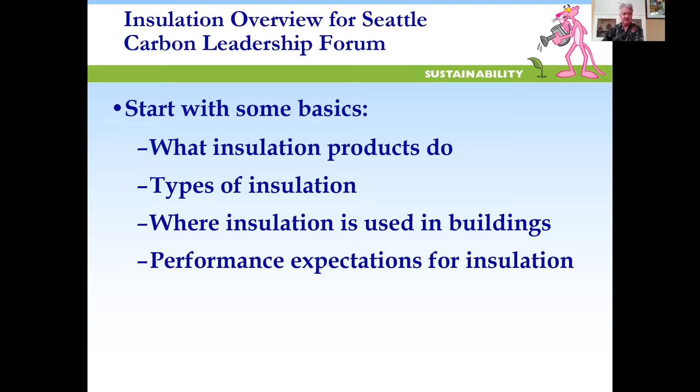So there are some of the things I'm going to cover in the first slides. If you all know this, the good part is I'm going to ask Justin to move fairly quickly through the early slides, but they will be available if you need to refer to them coming up. So Justin, if you could go to the next one, please.

All right, so I think those of you that work in buildings, design for them, know that whenever you're going to make an energy efficient building, thermal insulation in the building envelope is really important. So there's one definition from a trade association website of what insulate means.

I think the second bullet is more appropriate for architects and specifiers in that you're often limited by the building code in terms of the minimum required levels of thermal insulation or the thermal performance of envelope portions that you deal with. So building code sets the minimum, however you want to go to the highest levels of energy performance, like passive house, is up to you.

Those of you, particularly in the residential sector, know that a lot of times the provincial code, the state code, local, it may lag behind the current edition of the model energy code by several years. So that's good to keep in mind. Next, please.

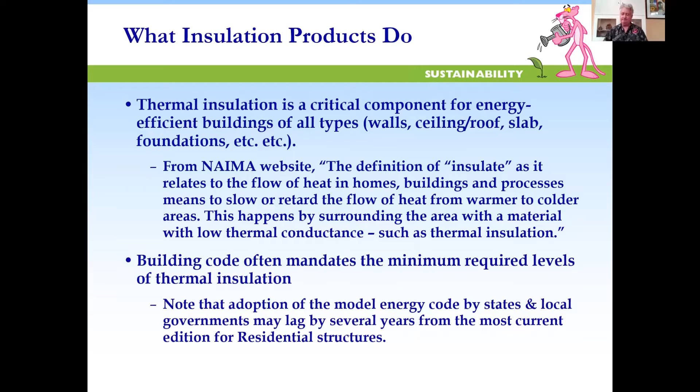All right, so again, we're gonna see some applications in buildings coming up, but if you ever move to a different part of the industry, if you get into commercial industrial, those things can include really high temperature applications. So like a chemical refinery, a power plant might take high temperature insulation for equipment, for reactors and so on.

At the other end of the spectrum, you need cryogenic equipment insulation. So liquefied petroleum gas terminals, for example, have some specialized needs. A lot of types of insulation have acoustic benefits. Not all do, but a lot of them do to various extents. Clearly, if you're designing for a commercial building, you need to worry about fire safety. So certain types of insulation can be used as fire blocking, fire safing.

Insulation can provide condensation control. You often see that a lot of products will have low perm vapor barriers so you can manage moisture. And then some types of insulation may also be effective air barriers. Not all, some of them are very air permeable, but some are pretty good. Next, please.

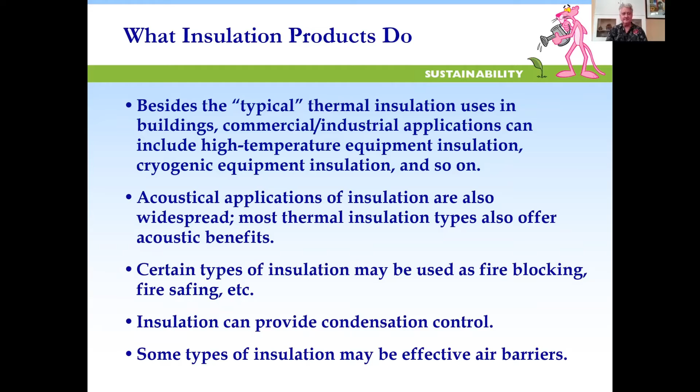All right, so here's a pictogram representing a commercial building. This could be a small office building. It could be a school, could be a hospital or medical building. And again, you may design things that are a lot taller than this, high rises, a little more spread out like a manufacturing plant, but they share some things in common, that the building envelope will be insulated. So roof insulation, wall insulation, foundation, slab, basement, whatever your local code probably requires.

And then you'll see some interior applications of insulation. So, where fire safety is important around elevator shafts, things like that. You may see acoustic applications around conference rooms, quiet rooms, and you may see some other soundproofing applications inside. But again, a lot of the envelope is going to be driven by code and your climate zone. Next, please.

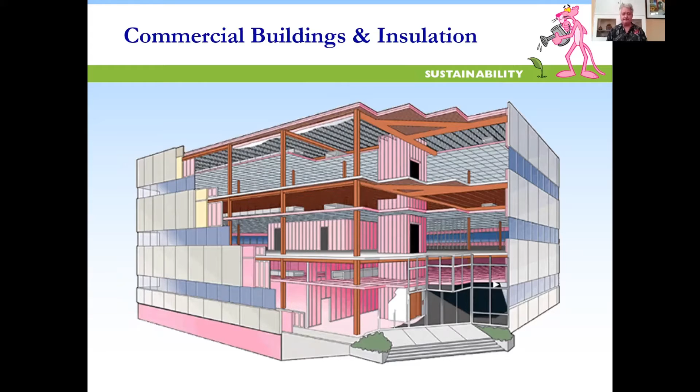So if you deal with the residential sector, homes, apartments also have to worry about the thermal integrity of the building envelope. So again, attic, roof, walls, foundation, basements, those all typically have code requirement minimums, and you'll see some interior applications. So again, these are typically acoustical for the most part, but you may see some people using more fireproof insulations in certain areas of a home.

One thing to point out that applies to both the commercial and the residential is that in an ideal world, your outdoor temperature would be very close to your indoor, and there wouldn't be a driving force for heat to move in one direction or another. But in reality, the outdoor temperature is higher or lower than your desired indoor temperature. And the greater that temperature difference, the greater the driving force. So the greater the delta T, the temperature difference, the bigger the

driving force there is. I know you folks in Seattle had a heat wave fairly recently. My daughter lives up there. You probably know, if you have a well-insulated house, that can help keep the inside cooler for a while. It's not a magic bullet. Eventually that driving force is going to move heat or cold air where thermodynamics wants it to go. So you can't really stop it completely. You can slow it down and let your HVAC system handle conditioning the indoor air.

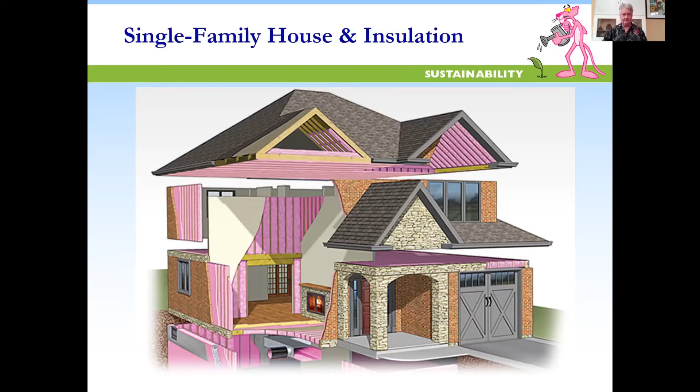All right, fortunately for you in the design community, you've got a lot of different choices of types of insulation. So some of these are going to be familiar to you. The fiber insulations, the rigid foams are very popular for roof and some exterior applications. If you go to your big box store, you'll see flexible foams for like pipe insulation. Spray polyurethane foams kind of dominate the spray foam part of the market right now. And those can be open, closed, or hybrid cell. And then there's a number of other insulation types. So cellular glass, aerogels, perlite, vacuum panels, polyester in some other geographical regions. So a whole bunch of different choices for you.

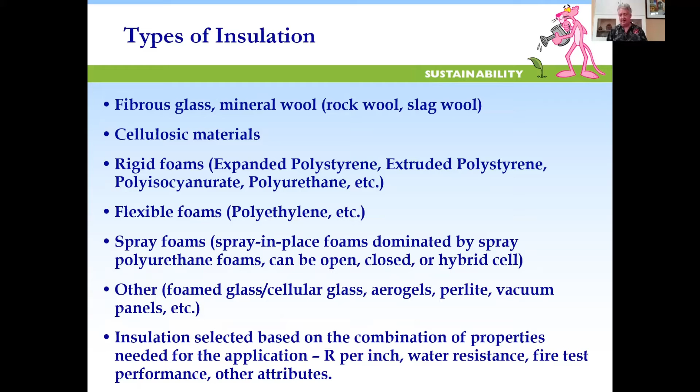And the bottom bullet really kind of summarizes that you're probably going to pick those based on a whole combination of properties. You may need a certain R per inch for your envelope that you're targeting. You may need something that's highly water resistant, something that has good fire test properties, and some other things that might go into your design choice, like you're building a LEED certified building and you want certain documentation for some of the LEED MR or IEQ credit opportunities. Next, please.

So we're starting to get into a little more detail, and maybe something that you may not know about, but typically each type of insulation will have its own ASTM consensus standard or specification. So here are some of the ASTM references for a number of the most popular insulation types used in single family or commercial. There are a whole bunch more of those. ASTM would be glad to sell you as many standards that come out of C16 as you want, but there's definitely one probably for any type of insulation that you would want to use. Let's go to the next one, Justin.

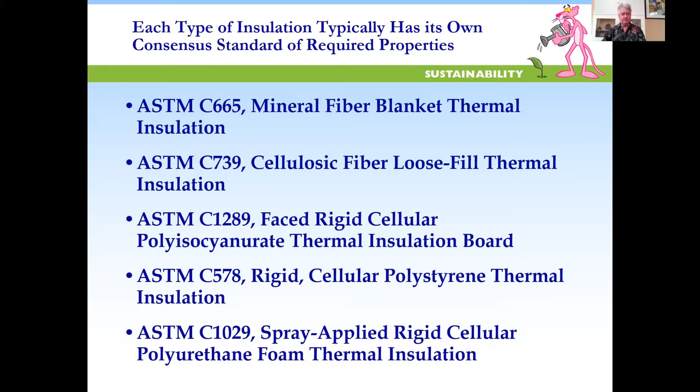Let's go back one, yeah.

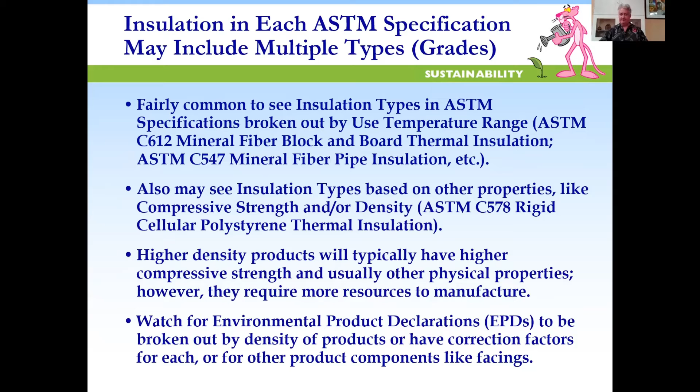But you need to watch to see if they're broken out by density or density range. They may also have correction factors for other product components like a facing. A good example will be a facing is going to make the most contribution to the lightest density and thinnest product. So it can be rather significant if you look at recycled content contribution across thicknesses, how that can vary depending on the product type. Next, please.

All right, so Justin asked Anthony and I to cover some topics that people had questions about or were of significant interest. So I'm going to tee up some of the initial discussion on blowing agents and their importance for some types of insulation. Anthony's going to go into a lot more detail on some aspects, but I think it's important to at least start out with a little bit of intro. Then I'm going to give some caveats for comparing environmental product declarations or EPDs that some of my life cycle practitioner colleagues have passed on to me. So I think those will be good before Anthony gets into his deck. So next one, Justin.

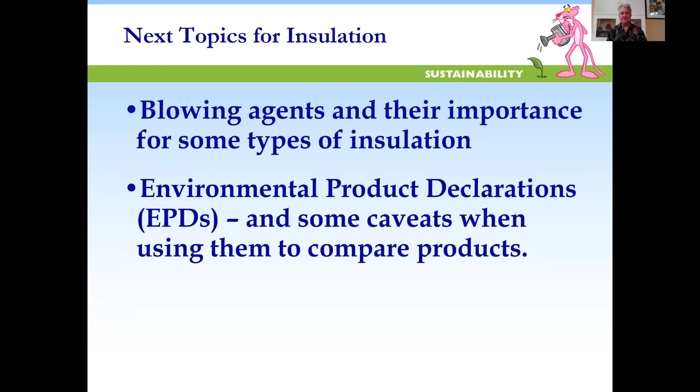All right, so not all types of insulation use a blowing agent. Some do, and of those blowing agents, they may not have a significant global warming potential GWP impact, but some do. So typically you see in the foam plastic insulations, the closed cell types, that the blowing agents can differ. It can depend on the insulation type. Also, a blowing agent can be chosen because it has a low thermal conductivity. So that will improve the product's R per inch as opposed to if you just let air fill the cells. So that's one reason manufacturers will use blowing agents for certain types.

For the most part, expanded polystyrene and polyiso board typically use pentane or other hydrocarbons. Pretty insignificant GWP impact. If you're looking at open cell or hybrid cell spray foams, the water is reacting with the isocyanate in the A side to yield carbon dioxide, so that makes the insulation foam up when parts A and B are combined. And carbon dioxide, by definition, is a GWP of 1. And so an open cell typically is air and CO2, after it sets up and fills the cavity.

Different type of insulation, extruded polystyrene in North America. Right now, hydrofluorocarbon blends are used for the majority of products, but there are now low GWP options available because of 2021 regulations that kicked in. And I'll have more on that on the next slide. And Anthony is also going to talk about that a bit in his deck.

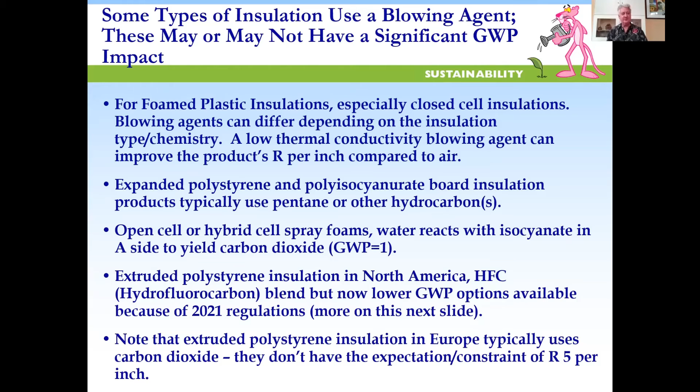All right, the HFC regs in Canada and some US states have kicked in. Most of them took effect in January 2021, and there's some other ones being considered for other US states. The main types of insulation they've impacted are extruded polystyrene and closed cell spray foam that use these high HFC blowing agents. I'll point out that DuPont Styrofoam and the Owens Corning Foamular NGX website content show the regulatory status now and future. Anthony's got a screenshot from the Owens Corning site. I'll also point out that I found that Kingspan for their XPS product also has some content on the reg status. So I wanted to give Kingspan a shout out that their website already also has that information as well.

So what you'll see with these redesigned extruded polystyrene products that meet the 2021 regs, they typically will use a low GWP HFC combined with hydrofluoroolefin, so an HFO blend, or it'll be a straight HFO with a co-blowing agent or process additive. The closed cell spray foams, for the most part, have used HFC 245fa. Almost all the manufacturers have offered HFO blown flavors in advance of the 2021 regs.

Typically, those are Opteon 1100 or Solstice LBA, the two in most common use. And I will say most of the spray foam folks had an HFO flavor well before the 2021 regs kicked in. There were a few that just made it under the wire, but most of them have offered an HFO flavor if you wanted it for 1 to 4 years now.

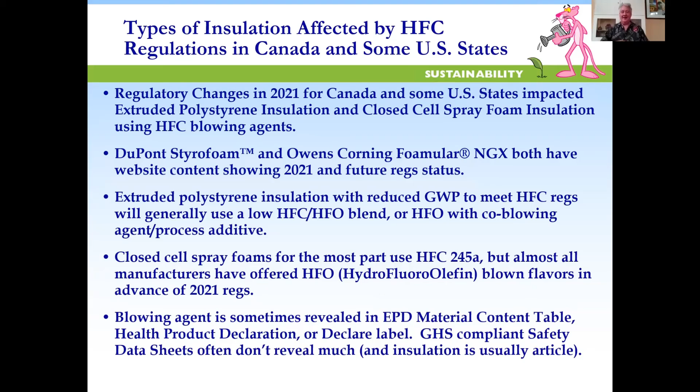All right, I'm going to set the stage for some of the upcoming slides that Anthony's going to cover. I wanted to share a couple slides that my colleagues in the group I work in shared with me. So we have 3 full-time LCA practitioners in the group I'm in, sustainability, and they have done a number of training presentations for people at Owens Corning on EPDs, embodied carbon, that whole thing, and they always have some precautionary notes. So I think it's good to at least point these out and make sure everyone's aware of those. There are a number of things on here that I'll let you read through. I'll emphasize some of the most important ones.

Clearly, the product category rules and the functional unit. So if you're trying to compare, say, an insulation product from Europe, which may have different rules, different functional unit than something in North America, you really have to be careful of that. You may need a secret decoder ring to figure how those compare. The scope can be really critical.

Obviously, if you've got a product with a high global warming potential blowing agent, and one manufacturer does cradle to gate, but another one says cradle to grave and has other modules where you may see significant emissions over the life of the product, then you can't compare those directly without one looking, unfortunately, too much better because you're only comparing certain modules in the EPD.

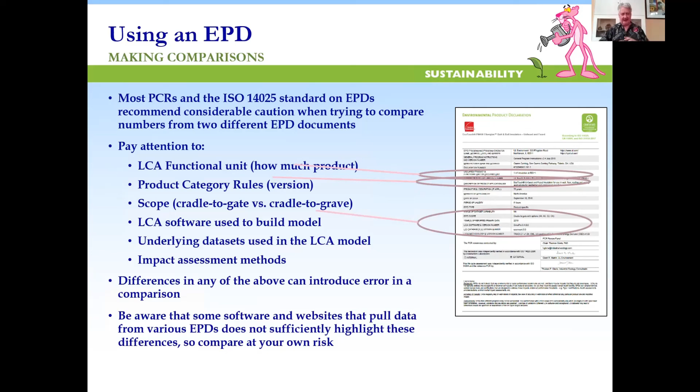That doesn't mean that people aren't comparing EPDs. If it's the only thing you've got, at least it gives you a standardized document you can look at, but you should look at the fine print, hopefully, and figure out what those differences are. So my last slide coming up again is on EPDs. So we can go to the next one, Justin.

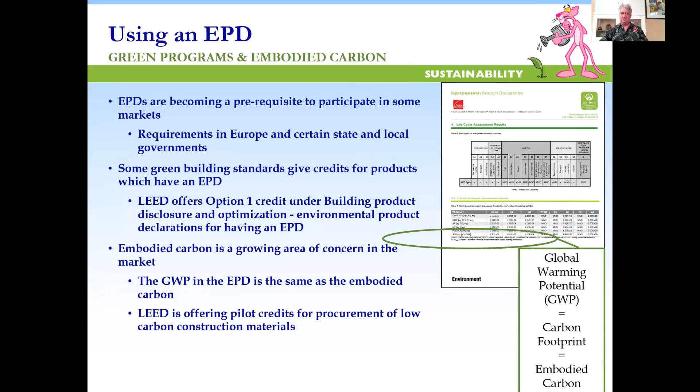Okay. So again, I think you all know this if you're in the design community, but they're really important in the green building rating systems. LEED v4 and v4.1 have really driven the push for manufacturers to publish environmental product declarations. LEED v4.1 has an additional MR credit for some of the optimization possibilities, including optimized reduced embodied carbon. So look for those. And I don't want to take too much more time because I know Anthony's got a lot to get to. So I'm going to go ahead and punt right now and let Anthony take it over.